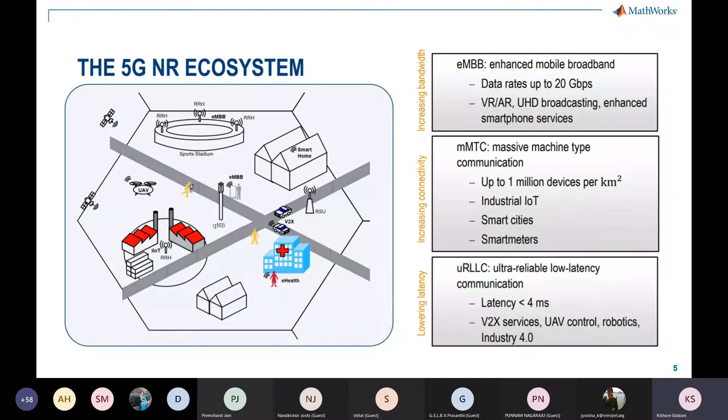Okay, this is good, but how do we achieve these applications, or how is 5G able to facilitate these three kinds of goals using the current standard? Let's look at what are the technical solutions that we have to achieve our goals of increasing data rate, increasing the connectivity, and reducing the latency.

So if we look at a high level, we can mainly take four main technical solutions. One is increasing bandwidth, which is similar to if you have a broad road, you will have a free flow of traffic. So in order to increase your data rate, one technical solution can be increasing the bandwidth at which your current communication operates.

And then the next one is better spectral efficiency, so that you will be able to utilize all the available bandwidth that was provided to you. Spectral efficiency also talks about having better adjacent channel leakage ratios and all, and another thing is having a flexible air interface to access the medium.

And then densification means employing more gNode Bs, so that you will have better coverage at every point of the location. So again, how do these technical solutions get translated into the existing 5G standard that was defined by the 3GPP standard body?

So one is, in order to increase bandwidth, unlike 4G LTE, the current 5G will be able to operate at FR2 band, which is a millimeter wave band, going from sub 6 gigahertz band up to now 60 gigahertz, giving you more bandwidth for better operation.

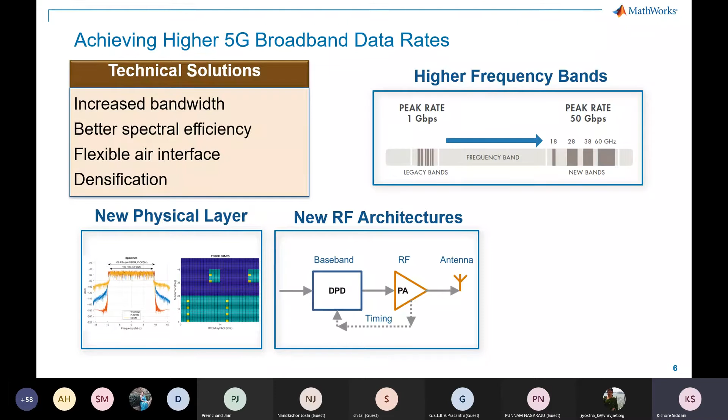And the third component that is important here is massive MIMO. When we are operating at high frequencies, there are high propagation losses within the medium. So what we are employing here is massive MIMO to steer the signal from the gNode B specifically towards the specific UE using beam steering and hybrid beamforming, which we will be discussing in detail as we go through.

So as listed on this slide, these are the important components: having a new physical layer and a more linear RF structure, and then employing massive MIMO communications to attain your 5G goals. In this session, as we go forward, we will pick up each of these - how to achieve a physical layer implementation using MATLAB and Simulink, how to improve fidelity of the system by including RF effects, and also how to bring in massive MIMO capabilities into the system.

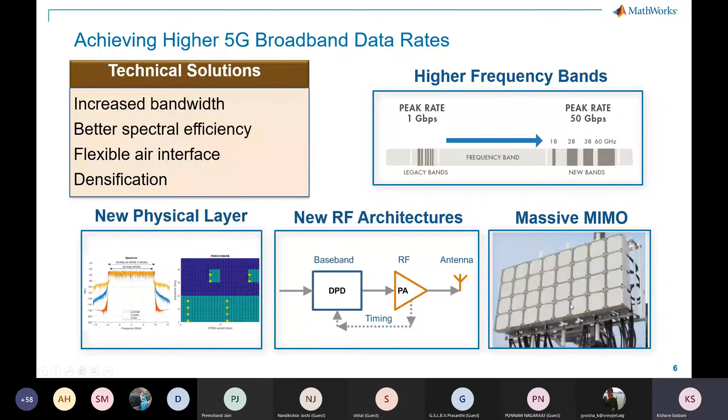Okay. So again, this discussion will be mostly focusing on giving you an idea of how you can model and simulate your 5G systems within MATLAB and Simulink. And for the standard part, right?

If you are new to the 5G standard or 5G NR standard, we have a series of videos. We have 16 short videos on our website explaining each and every parameter in 5G, compared with a 4G LTE system. I would highly recommend you go through this video series. I'll be sharing this slide deck at the end, so that you can go through the link and view the videos that are available on our website regarding the 5G standard itself.

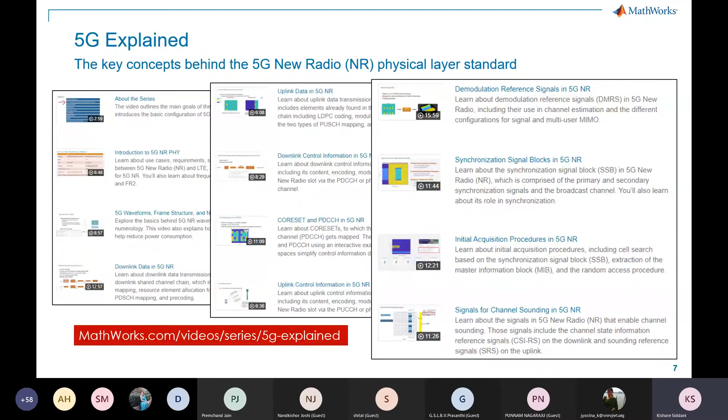Our main focus throughout this session will be mostly on the implementation or modeling of these 5G systems in MATLAB and Simulink. Okay, right? So as we saw in the previous slides, three components we are going to discuss. One is physical layer, next one is RF, and the third one is massive MIMO. And we will first see the physical layer and simulation. But before we go into that, let me give you an overview of a general wireless system.

Okay, I think before I go there, I'll just stop and check the chat. So, ma'am, is the chat enabled, right? Hello? Could you hear me? Yeah, Kishore, you are audible. Yes, sir, can hear you. Okay. Yeah, ma'am. So the chat is enabled, right? Yes, sir, it is enabled.

Okay. So I think Ramana, our colleague, posted a question in the chat. Are you aware of the 5G Toolbox? Before I go and introduce you to the 5G Toolbox, are you aware of it? You can type in your answers. I know this is a post-lunch session and it's a long session, so it's natural that we may not be active, but we can make this session as interactive as possible, and we will also go through many more demos as we go ahead. So I request participants to type in yes or no based on whether you are aware of the 5G Toolbox from MathWorks or not, before I go to the next slide.

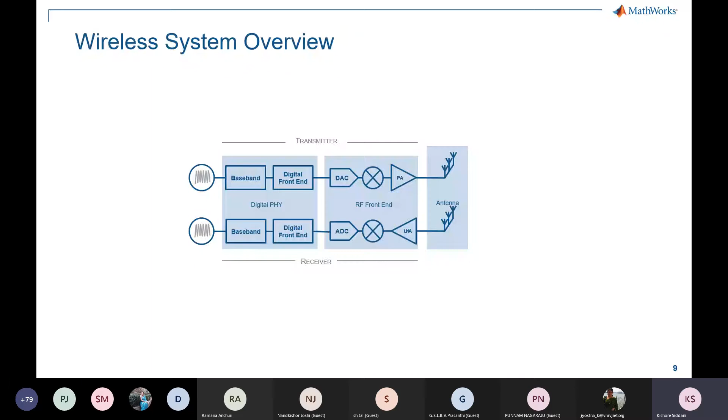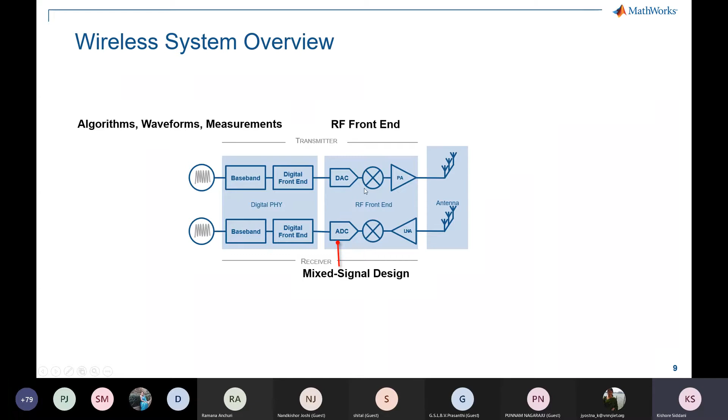Most of you will feel it easy to go through the next slides. So first of all, before I introduce the 5G Toolbox, let me talk about the wireless system itself, right? If you take any wireless system, not necessarily a 5G system, you can broadly classify it into three main parts. One we call the baseband, which consists of physical layer, algorithms, waveforms, and where we model our measurements. The next part consists of the RF front end, which consists of ADCs and DACs to convert between digital and analog domains. Then you have modulators and other nonlinear RF components like power amplifiers. And at the receiver, you will have low noise amplifiers and the demodulator components.

The third section of a general wireless system is antennas and antenna arrays, which convert your incoming electric signal into an electromagnetic signal and transmit it through the medium, right? While the channel is not an inherent part of the system, it is also a very important component when we look at system performance while transmitting and receiving. Between the transmitter and receiver, my signal will be affected as it passes through the channel. So the channel plays a critical role when we simulate end-to-end systems, from a transmitter, through the channel, to the receiver. So these three are the key components of a wireless system.

And we saw in the previous slides that for baseband 5G, we have a new physical layer defined by the 3GPP standard. For RF, we need more linear power amplifiers. And for antennas, we need massive MIMO antennas for 5G. So we will discuss these three sections in detail. So let me start with 5G.

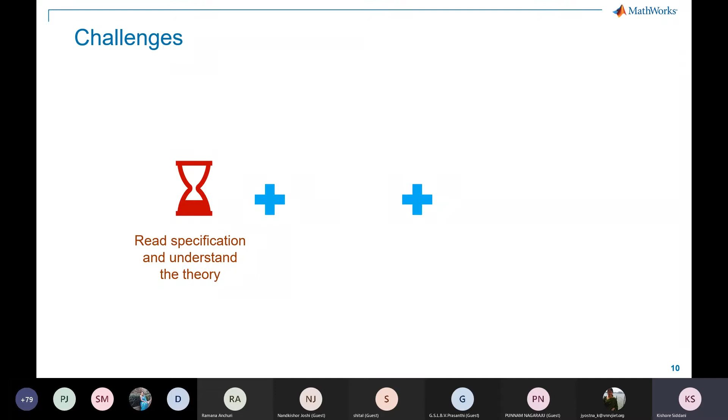So first, before we go ahead discussing the physical layer: let's say at this point of time you are going through this FDP training, and after this series of sessions you might want to implement a 5G system. The first step generally is to read through the entire 5G specifications and understand the theory part of that standard. And then you need to implement the algorithm specified in the standard, which would take a significant amount of time.

And then, once you implement your first cut of the model, you need to verify whether the algorithm that you implemented is in compliance with the 5G standard or not. So this would generally take a long time and reduce your development speed. And these are critical challenges in advanced wireless systems like 5G.

So here is where 5G Toolbox from MathWorks comes into place, with support for 5G, and it will let you focus on what matters the most. That is modeling and simulating the system, and not spending your time just going through the standard and understanding it by itself. So how does 5G Toolbox help in achieving this? How can it simplify your modeling and simulation, or make it easy?

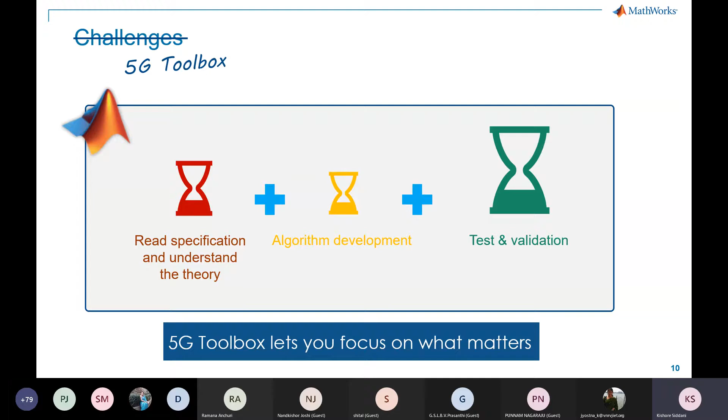If I look at 5G Toolbox use cases, I can classify them into three parts, starting with waveform generation. What I mean by waveform generation is that 5G Toolbox enables you to generate 5G compliant waveforms directly. You can generate a fixed reference channel waveform, NR test models, or custom waveforms based on the 3GPP standard. How we generate them, we will see in the next slide. So this is one: you can generate your 5G compliant waveforms off the shelf.

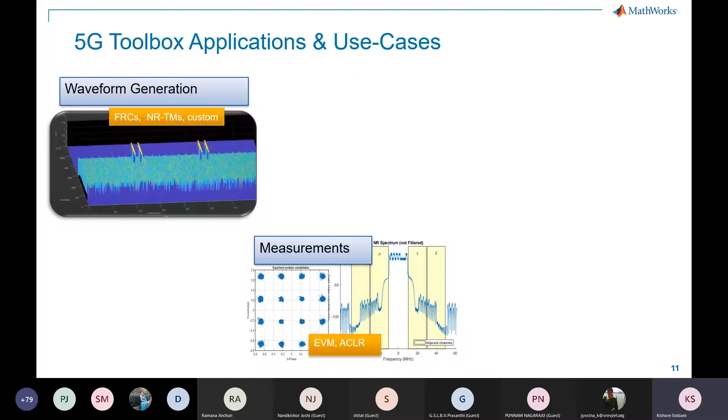And the next thing is measurement. Once you implement the system, the next necessary step would be: how is my system performing? To look at the performance of the system, you might need to look at components like ACLR, which is adjacent channel leakage ratio, and EVM, error vector magnitude, parameters of the end-to-end simulation. As well, you might need to do an end-to-end simulation to look at performance curves like BER versus SNR curves, giving you at what SNR you would achieve your required BER for a specific configuration.

So all these three things, waveform generation, measurements, and end-to-end simulation, can be easily achieved through 5G Toolbox with its support for the 3GPP 5G standard. Along with this, whatever waveform is generated, you can interface it with real RF signal generators to transmit the signal, or you can use SDR devices to stream the RF signals into MATLAB or Simulink, and then process your 5G signals inside the MATLAB and Simulink platform. So either you can generate and transmit, or you can receive the signal through an RF component, get it back into MATLAB and Simulink, and do the necessary processing required for 5G decoding. I will go through each of these things in detail.

As we go through the presentation, it is important to reiterate and see where we are. Currently we are discussing the physical layer part. Within the physical layer, we are introducing how 5G Toolbox is useful for physical layer modeling. And within 5G Toolbox, we are now discussing each of its capabilities like waveform generation, measurements, and end-to-end simulation. Now we will go through the waveform generation part of the 5G Toolbox capability.

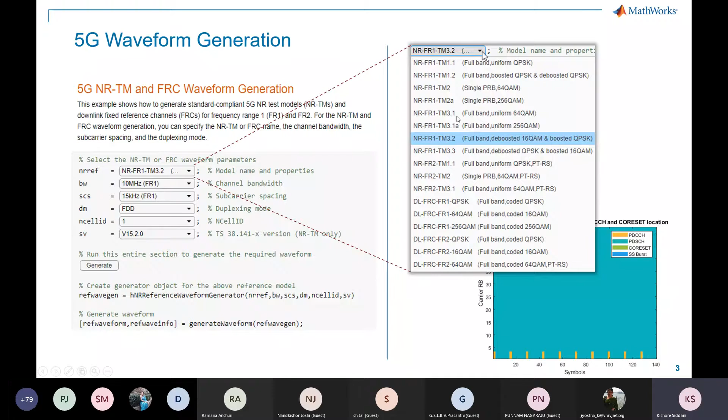Okay. And not just that, if you are new to the 5G standard itself, these might seem a bit new, but these define the frame structure within your 5G waveform. And as I told, you will be able to generate a custom waveform as defined in the 3GPP, and you can also customize each frame within the generated waveform.

Like you can customize your physical downlink shared channel, or physical uplink shared channel, or control channel, or broadcast channel, or random access channel, and also the synchronization or reference signals that you are generating, the primary synchronization sequence or the secondary sequence, or demodulation reference signals, or the CSI-RS reference signals. All these things you can customize in the app, and you can generate your own waveform based on the 3GPP standard, not just the 5G NR test models that are defined in the 3GPP standard.

Now let me go to the MATLAB and Simulink window, and I'll show you how we can use the waveform app and how we can generate the waveforms easily.

Let me know or give me a thumbs up in Teams if you are able to see my MATLAB window. You have reaction symbols enabled, I think. So if you have them enabled, give me a thumbs up, or you can post in the chat. Yeah, I can see some of you giving a thumbs up. Please go ahead and let me know if you are able to see the screen. Okay. I got a few thumbs ups, and I think you are all able to see my screen.

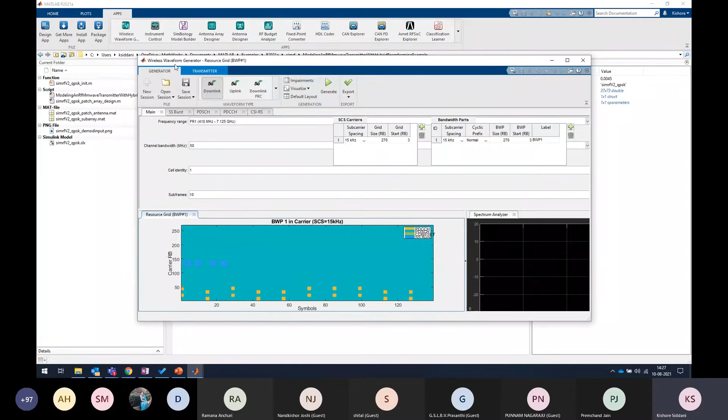So here are a lot of apps available for many of the toolboxes that come together with MATLAB and Simulink. The 5G waveform generator will be under signal processing and communications. You can go here and just click on the 5G waveform generator. And then you will see it opens up in the Wireless Waveform Generator app with 5G available. I hope my screen is visible. There might be resolution differences, but I will read you through the components that I am clicking on the screen so that you will be able to understand what those parameters are.

Once you open the app, it will come up with an interface like this. What you see here, NR 5G New Radio, these are the capabilities to generate different kinds of waveforms directly. The 5G downlink and uplink means you can generate a custom 5G downlink or uplink. 5G downlink FRC is fixed reference channel downlink, and likewise fixed reference channel uplink. And then we have a lot of test models as defined in the NR 3GPP standard that you can generate. So let me show you an example with the uplink fixed reference channel.

Once you click on that, it will give you all the available options for you to generate that specific waveform. Here you can select the frequency region of operation. Is it sub 6 gigahertz or a millimeter wave band? I'll go with the FR1 band, and you can now select the MCS, modulation and coding scheme. I'll select a 64 QAM signal, and then you can select the fixed reference channel model. Maybe I'll go ahead with the last one, which is a 100 megahertz channel bandwidth model.

Okay, so these parameters will define what kind of waveform you are going to generate. Again, not just the waveform parameters, you also have impairments that you can add to the waveform that you are generating.

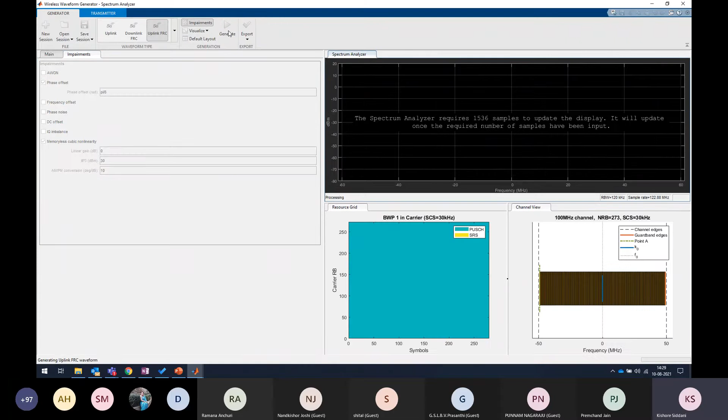You can add a phase offset or frequency offset to the generated waveform. Maybe I'll add a phase offset, and you can also add other nonlinearities like IQ imbalance or memoryless cubic nonlinearity, or add AWGN noise to the transmitted signal. So once you select your main components and your impairments, you can then directly click on generate here to generate whatever waveform you would like to have.

So this is the 100 megahertz channel bandwidth. You can see this is -50 to 50. This is a 100 megahertz 5G signal that we are generating. And down here is an OFDM grid, or resource grid, which is now completely occupied with uplink shared channel data. And what you're seeing on the bottom right is a channel view indicating which bandwidth is occupied by the transmitted OFDM signal. You can see that -50 to 50 is occupied, and it is indicating the channel edges as well.

So as we saw here, you can easily generate a waveform, not just generating and visualizing. As I told, it is very easy to interface with RF instruments if you have them connected to the PC that has MATLAB and Simulink. So once you have a specific instrument, now I am generating an FRC uplink 5G waveform, you can then select the instrument here and configure it based on the instrument IP address.

Then select your center frequency for transmission, give your bandwidth or what you would like your output power to be, and then just click on transmit, so that whatever 5G compliant waveform you are generating directly from the app, you would be able to transmit through your RF instrument over the air. So that's how it's very easy to directly generate and test your systems as well.

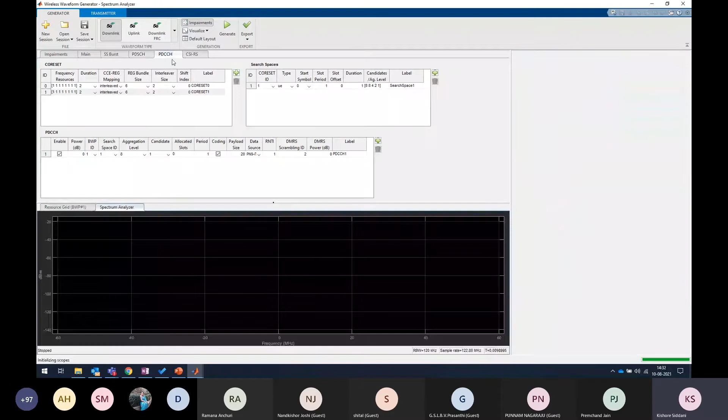This is again 5G standard compliant, but you have access to configure each and every parameter within the frame. If I click 5G downlink, you will now have options to configure your SS burst, downlink shared channel, downlink control channel, and your CSI reference signal. You can control and configure your CORESET configuration or the aggregation information in the transmitted signal.

This is again compliant to 5G, and you are able to configure it completely the way that you want. It is available for both downlink and uplink. And once you do that, adding impairments on the transmitter is similar. And one more option that I want your attention to is whatever waveform you generate, you can completely export it using export, Export MATLAB Script.

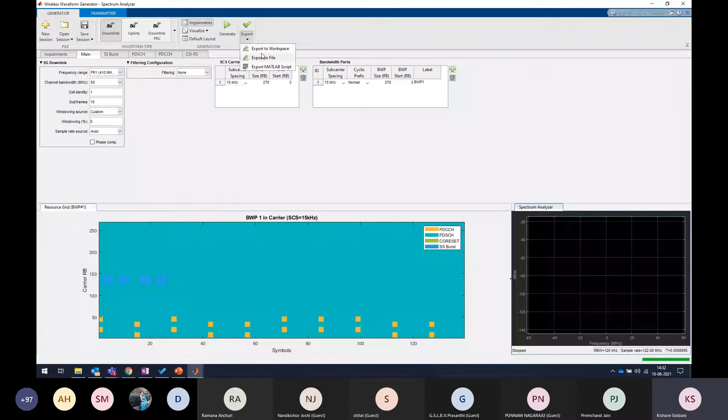What it will do is export whatever parameters you chose in the app into a MATLAB script. So next time when you want the script to run several times, you need not go to the app and design every time. You have the script now, and you can just write a for loop at the top of it, so that this script will run multiple times to give you the generated waveform multiple times.

And one of the key important features of 5G Toolbox is, as I told, 5G Toolbox has implemented everything 5G compliant, and whatever is implemented is completely white box. What I mean by white box is, suppose I have an SS burst configuration, if I right click and click on open, it will open the actual source code for how this is being done for SS configuration.

The entire source code is available for you to view, and if you have any modifications you want to do, you are free to edit and modify it as per your requirement as well. So whatever functions are used in 5G Toolbox are completely open box for users to view.

So let me come back to the presentation. So I hope you got a fair bit of idea into how you can use the waveform generator app for wireless waveform generation, right? So let's now go to an end-to-end simulation, or link level simulation. So first, to give you a very simple idea of what link level simulation is.

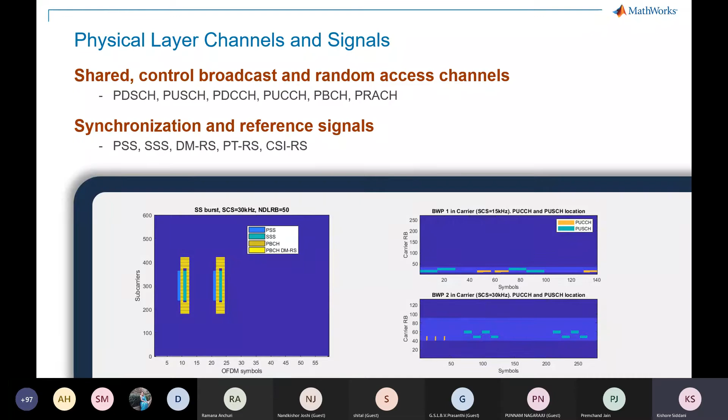You have a transmitter, then you have a receiver, and in between you have a channel, and you want to simulate from transmitter to receiver. Do the entire simulation and see what your performance result will be, like what is my bit error rate, and at what SNR I am achieving my required bit error rate, those kinds of things. So along those lines, one of the important things to note here is the channel model that sits between the transmitter and receiver.

And again, the 3GPP technical report 38.901 defines specific channel models with which you might want to test your 5G system. There are two kinds of model. One is the TDL channel model, which is the tapped delay line model, and the other one is the CDL channel model, which is the clustered delay line channel model. So the TDL channel model has different profiles like A, B, C, D, E or a custom profile, and it is generally a normal 2D channel model. It defines delay spread, Doppler shift and MIMO correlation between the transmitter and receiver to simulate your system.

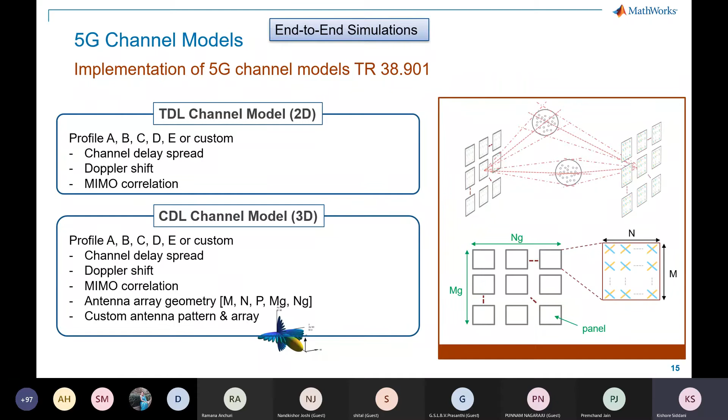Whereas the CDL channel model is a more sophisticated channel model, giving rise to spatial correlations, and it exists more in terms of 3D. So both the TDL channel model and CDL channel model are available off the shelf from 5G Toolbox. You just need to select the model and use it in your simulation when you are doing the end-to-end link level simulation. Okay.

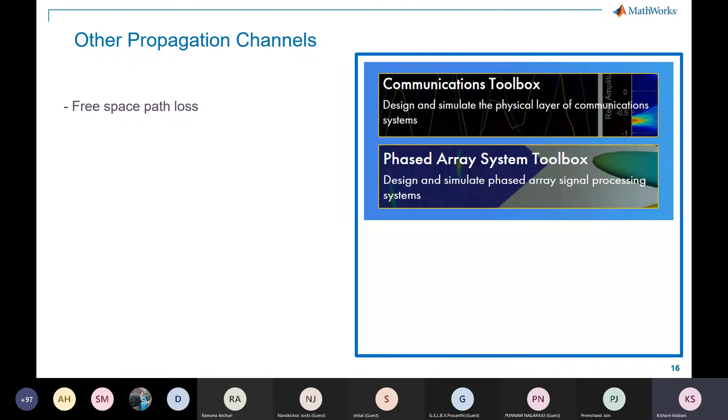So not just the TDL and CDL channel models: by utilizing the channel models from Communications Toolbox and some features from Phased Array System Toolbox, you would be able to simulate a free space path loss channel between transmitter and receiver, and also, if there are effects like gases, fog, or clouds between your transmitter and receiver, how the signal is attenuated as it goes from transmitter to receiver. You would be able to simulate that as well.

And generally 5G systems are MIMO. You would be able to simulate MIMO multipath fading channels as well, and other channel models like WINNER II and scattering MIMO channel models, other than the TDL and CDL channel models defined in the 3GPP standard. So these are all available off the shelf from the MATLAB and Simulink platform. You just need to select the channel model you want to simulate, and you can analyze how this channel is affecting your transmit signal and how you are correcting it at the receiver side, right?

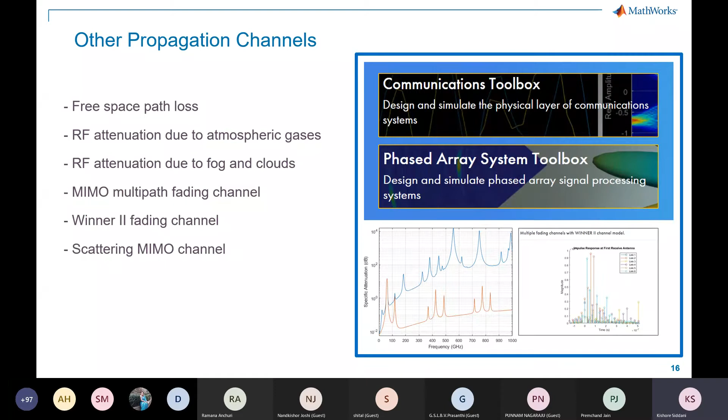So to further simplify your system implementation process, we have examples for NR physical downlink shared channel throughput analysis, wherein you have a complete transmitter section. It starts from the DL-SCH frame, encoding it to PDSCH, doing the precoding, and finally generating the OFDM waveform and transmitting it through a channel model, a CDL or TDL channel model, and then going through the complete receiver chain for decoding the frame. That means you start at the transmitter and go over the entire chain for end-to-end link level simulation. So we have an example available for this.

So maybe to quickly point you to that, I'll open MATLAB and show where you can find it.

A quick question. Ramana, maybe you can give me a heads up if you are able to see my help documentation screen. Yes, now it's up. Okay, okay. Is there any latency between what I'm speaking and how the slides are going? Not much, Kishore, but I heard some jitter twice, but it's fine now. Sure, sure. Please, if there is anything that is impacting, let me know. I will let you know.

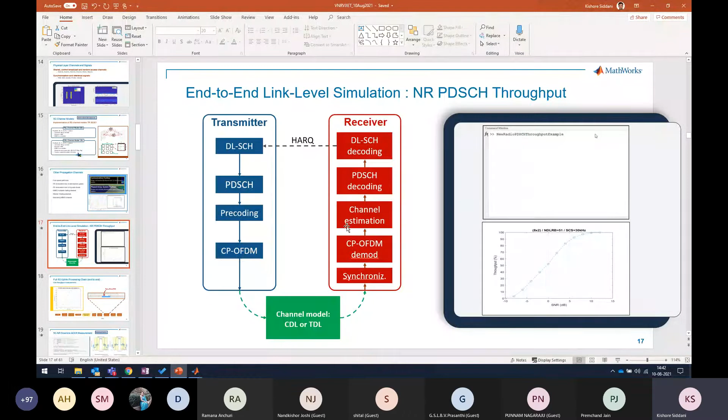So this is for physical layer downlink shared channel throughput simulation. Similarly, you have something for uplink processing as well. It's again end-to-end, wherein you will see shared channel uplink. It's again passing through a channel model, and at the receiver side, you will again have a similar kind of time sync and all, as per the uplink parameters.

And as I'm reiterating, whatever modules you see in the receiver, they are completely open white box, and you will be able to see what algorithm is used inside to achieve that specific functionality. So what MATLAB or Simulink is providing you is a platform readily available with all the examples for you to easily generate and test, and also giving you complete flexibility to edit wherever you may want.

Okay, I think I'll go to the next section. So we saw two things: first, waveform generation, and then the next one is end-to-end link level simulation. And the third one I want to concentrate on is measurements. Again, here we have examples readily available, live scripts.

Wherein you can use the 5G toolbox to do ACLR, which is the adjacent channel leakage ratio. We have an example for adjacent channel leakage ratio measurement.

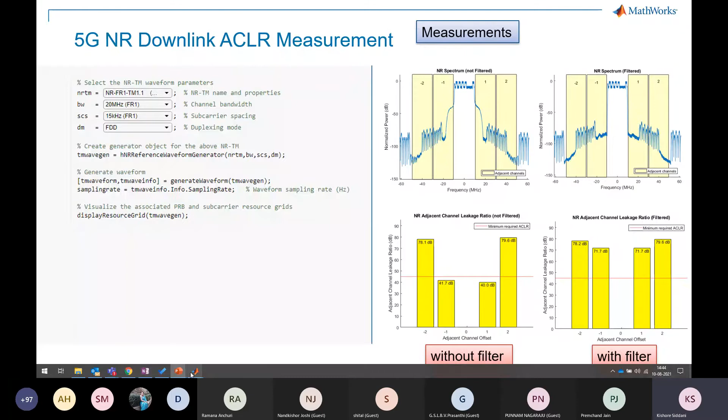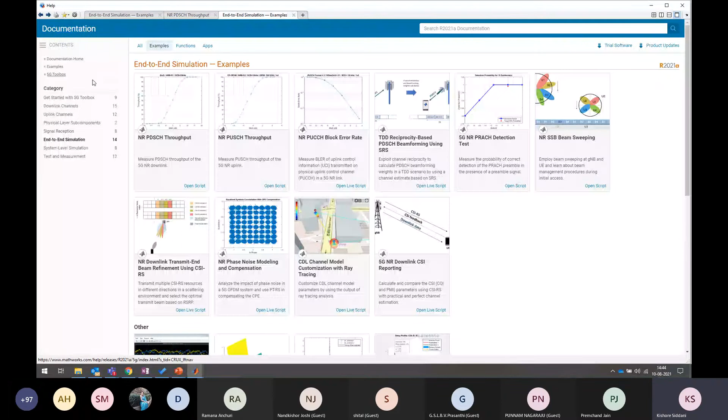If you go to the help section, test and measurement, you can see various examples, and here you can see 5G downlink ACLR measurement. In this specific example, we are generating an NR waveform and then filtering it and upsampling it, and then doing ACLR measurement.

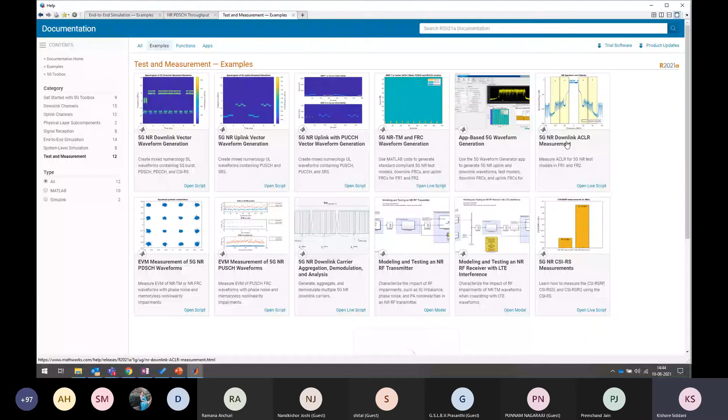How is my output without filtering and with filtering? If you look at this example, without filtering I can see there is a significant amount of signal in the adjacent band, which is not desirable. After filtering, when checking the ACLR measurement, I can see a reduction in the adjacent channel, an improvement in the ACLR gain by 40 dB.

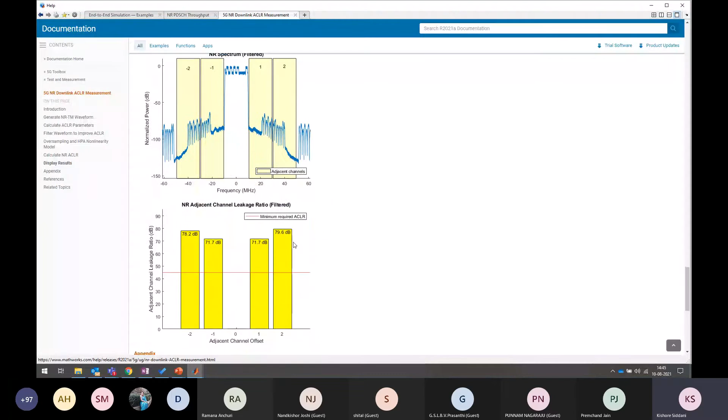So you have readily available examples for measurement sections as well, like ACLR measurement, and error vector magnitude measurement, wherein you generate an NR waveform, which is easy to generate from the waveform generator app. You add impairments like we saw here, adding phase noise and other nonlinearities, and then pass it through end-to-end link simulation to look at the error vector magnitude for each of your configurations.

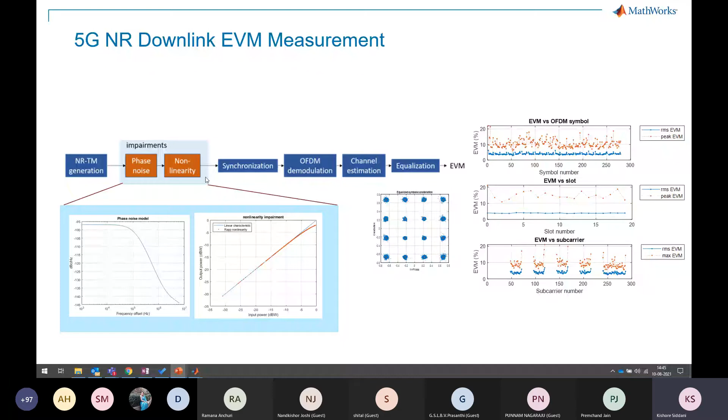Again, you also have a CSI related measurement, which will indicate the channel quality. The examples related for these are also off the shelf available within the 5G toolbox.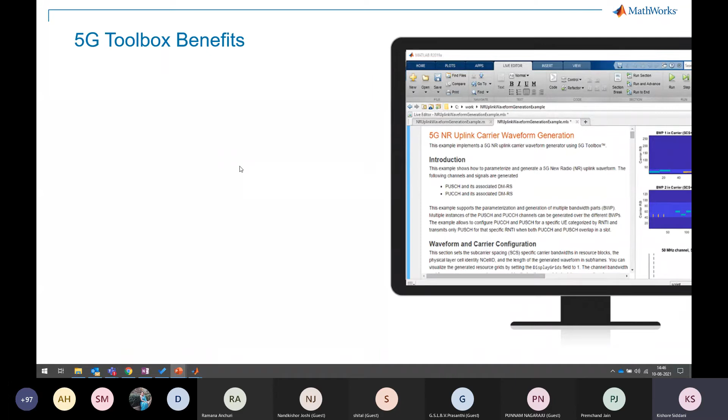So coming to a summary on the 5G toolbox itself, it has 5G-specific functions and a lot of examples for you to easily build up the physical layer that was specified in the 3GPP standard, without having to start everything from scratch. You have everything available now. You can make use of the existing waveform generator apps and examples to get started immediately, and it's also backed up by extensive documentation, not just for 5G toolbox. For all the toolboxes that come with MATLAB and Simulink, you have very dedicated documentation available, giving you highlights on each functionality and how you can achieve them.

And these 5G results are verified against external sources as well. And the point that I keep iterating, whatever functions we have seen are completely open, and you can visualize the MATLAB source code. So one advantage is if you want to tweak and tune any of this code, you are completely free to change and use it in your own systems to explore on that front.

And whatever MATLAB code is there, if you are looking at generating C code, maybe to use in some DSP processors or similar parts, the functions coming from 5G toolbox are C code generated and supported. You can generate the C code from the existing MATLAB source codes, so they are easily C code generatable. At the end, when I'm talking about prototyping and implementation, I will talk about how you are actually able to generate the C code as well, and what product is helping with it.

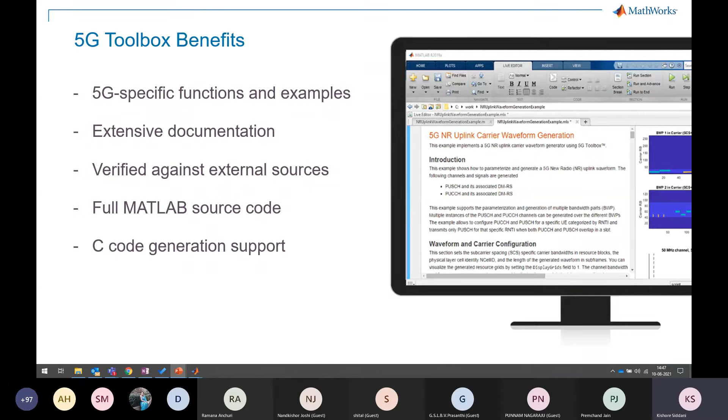So that's on the 5G toolbox front, and on the baseband physical layer part. I'll stop here for a moment. If you have any questions, please feel free to post. I think we have 30 plus 10, 40 minutes more, and we should be good to cover the remaining parts.

So participants, on the 5G toolbox we have seen its capabilities like waveform generation, measurements like EVM or ACLR measurements, and end-to-end link level simulation, which are all off the shelf available.

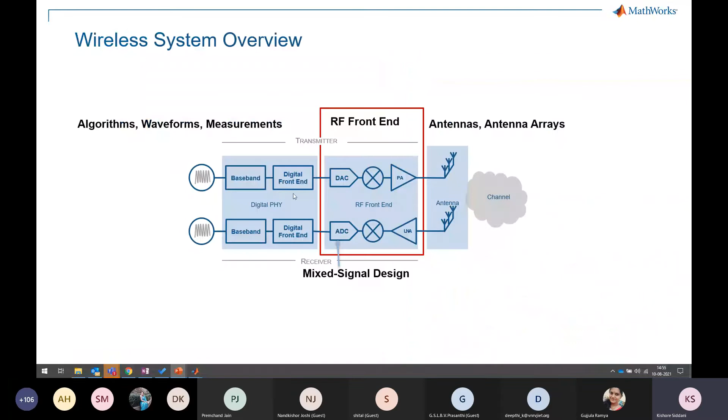Okay, let me move ahead. The next part is the RF part, which is the second component in our entire wireless system. We saw baseband and how the 5G toolbox helps. Now let us concentrate on the RF part, basing the 5G system as the main topic of discussion for this session. I want to concentrate on one key RF component, and a major requirement for 5G implementation is the power amplifier.

A power amplifier is nothing but you give some input signal and you want the system to amplify it and give the output signal. Suppose you give a number 2 as input, you want the output system to amplify it by 2 and give 4. You give 3, you want 6. You give 8, you want 16. That's true as long as your power amplifier characteristics are linear. But if you see general power amplifiers, they are not entirely linear. They have non-linear curves, as you'd see here, so the characteristics are not linear at high input powers. That means if you give 10, you're expecting 20, but you might only get 15 or 16. In terms of power, these non-linearities translate into intermodulations and undesired frequencies in the output.

So what technique is available to get the linear characteristics we want? Just use another component called DPD, or digital pre-distorter. The characteristics of DPD are such that they are opposite to your power amplifier characteristics. So when you send the input signal through a DPD with these characteristics and then through a PA with its characteristics, they cancel out each other's non-linearity, and the resultant effect would be linear at the output of the power amplifier. This looks simple in theory, but if you look deeper into power amplifiers, it's not just non-linear.

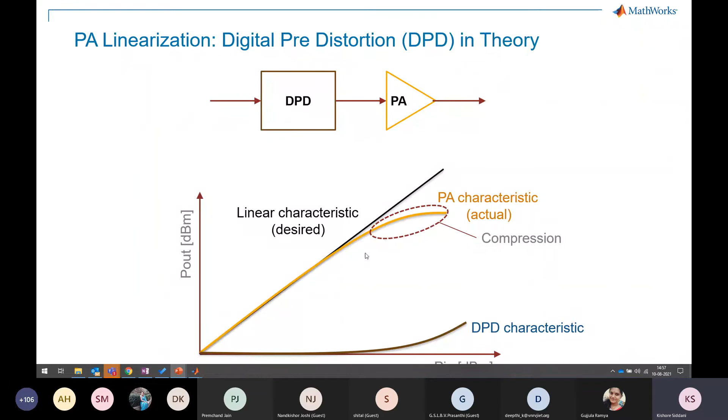It also has another impairment, which is memory based. What we mean by memory-based characteristics is that at any point, the output of the power amplifier might depend on its previous input, or the existing input signal at the input of the power amplifier as well. This is what we call the memory effect.

So in order to design your DPD, you first need to know how your power amplifier is functioning. And if it is just non-linear, you might model this power amplifier using mathematical equations, like a line equation or a parabola equation or something like that. But here you can see these characteristics are not only nonlinear but also having a memory effect. So in order to model the power amplifier first, before we go into DPD, we need something called a memory polynomial to express the characteristics of the power amplifier.

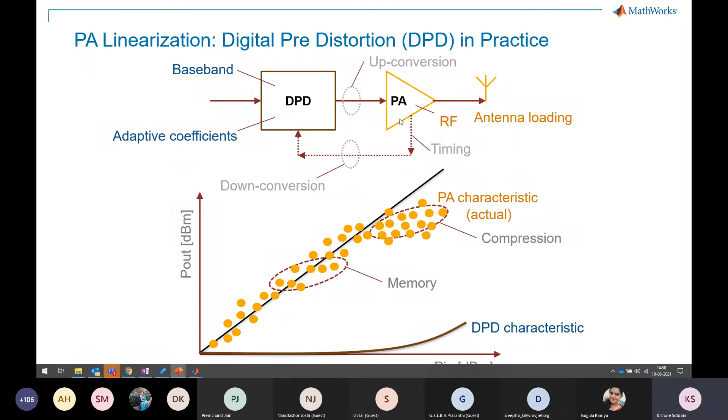So now I will talk about first how we characterize this power amplifier, and then we will talk about the DPD part. Okay, so what are the resources available to characterize a power amplifier which is non-linear and also has a memory effect? So first, take a real power amplifier, send some input signals and record your output signal. Then you will have, for a specific input, what your output will be at each power point. And then you can plot input voltage across power gain, that means at each input, what is your gain. If this gain plot is a completely straight horizontal line, then we call it a complete linear circuit. But here it is not linear, and you have non-linear characteristics of the power amplifier.

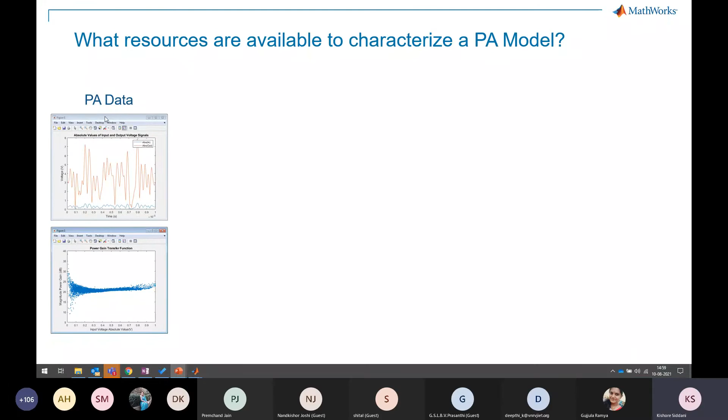So once you have these characteristics and these graphs, you can use something called the MATLAB fitting procedure, which, like all the 5G Toolbox algorithms, is also a completely white box algorithm, which you can use to fit the characteristics of your original power amplifier into a gain transfer function, and derive what are called power amplifier model coefficients. To put everything into basic words, what you need is power amplifier model coefficients which will characterize your model. I'm able to define a power amplifier using these power amplifier model coefficients.

So once I derive these model coefficients, I will put these coefficients into a block called memory polynomial, which is again a block from RF Blockset, to characterize your power amplifier. So by the end of this step, you will now have a power amplifier characterized with your power amplifier model coefficients. So now, as you know your power amplifier and its model coefficients, the next step would be to design your DPD opposite to that of your power amplifier. So we will now see a live example and see how this DPD works together with the power amplifier.

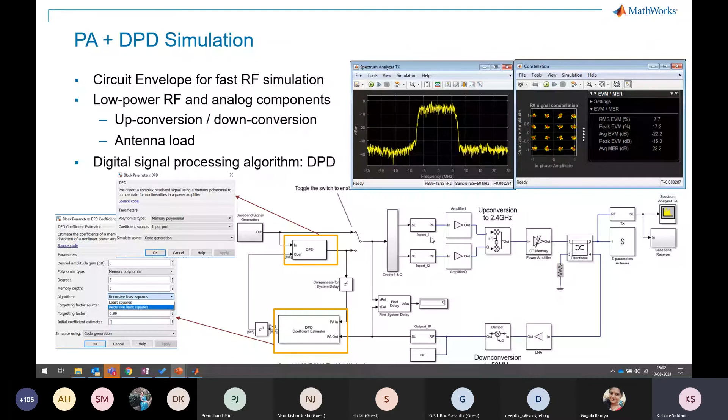So actually, maybe I'll go to the next slide and show you how this works. So this is a recorded video of how this model works. Okay, so now, just a second.

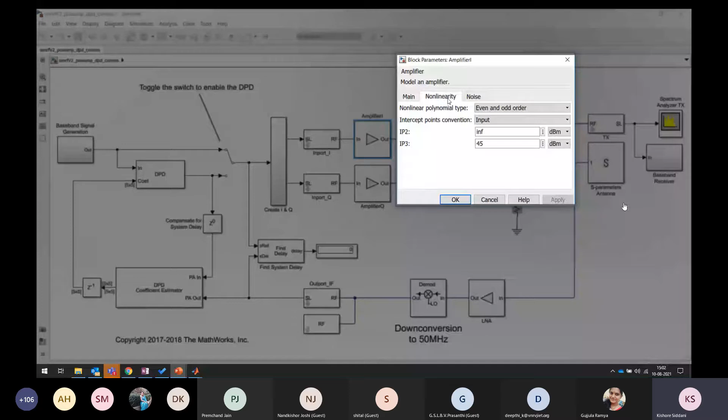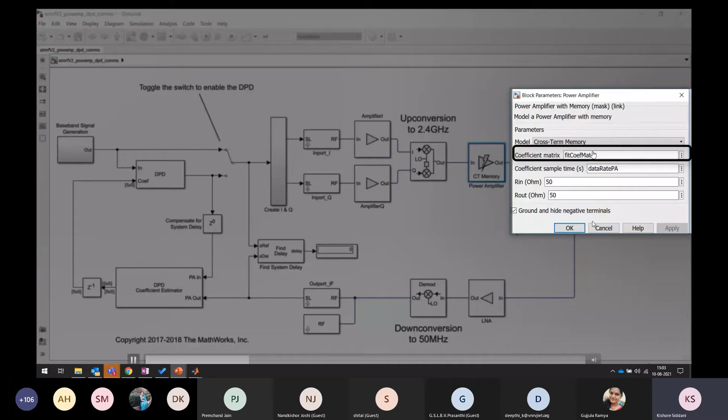So here I have a normal amplifier which is defined by its nonlinearity and noise level. This is not a power amplifier, and here I have a power amplifier block. If you see here, inside of the power amplifier block, I am defining the characteristics of this power amplifier by, you can see, the fit coefficient matrix. So I am telling that my power amplifier has these coefficients, so that I am actually modeling my original power amplifier in a Simulink block by giving it the coefficients, and we discussed in the previous slide how we get these coefficients by doing that fitting process.

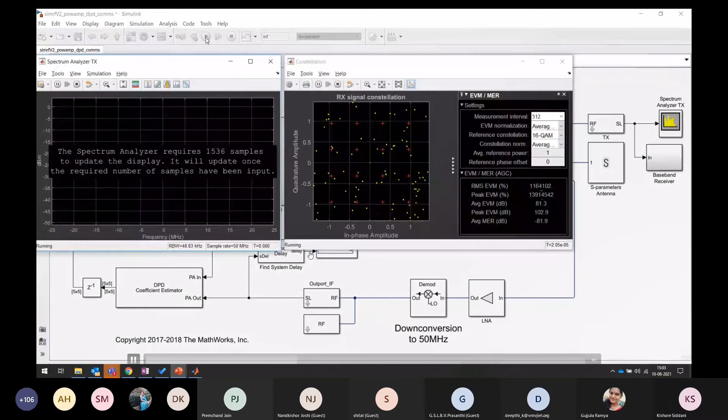Okay, so I'm now first simulating without DPD. I just have some baseband signal and it is passing through the RF section. Again, all the RF components that you see here, amplifiers and power amplifiers, are modeled using RF Blockset. And I'm simulating without DPD. I'm not doing any digital pre-distortion.

And if I stop simulation at this point, you can see the waveform is not so good. You can see there is a lot of distortion at the falling edges. And if you observe the average error vector magnitude, it is around minus 15 dB, which isn't quite good enough. Okay. Here are the distortions, and here is the average EVM.

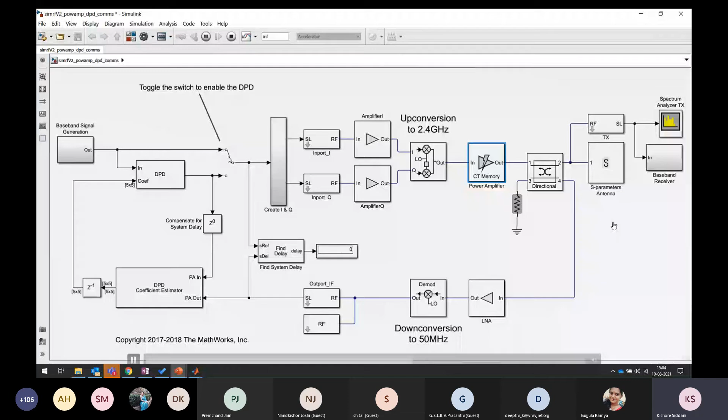Now let us simulate that together with DPD. Now what it will do is it will take the feedback. The DPD coefficient estimator will estimate the coefficients and put them into the DPD, and this DPD block will digitally pre-distort the input baseband signal.

You can now see the result. Previously, it was around minus 15 dB average error vector magnitude. It is now reduced to minus 26. The error is reduced, and you can also see that the graph has less distortion, telling that the graph is more linear, or the power amplifier is becoming more linear.

Right. So again, linearizing the power amplifier is an important concept in 5G systems, and if you are designing a power amplifier and digital pre-distortion algorithms, we do have the blocks available to do the modeling and also simulate them in the MATLAB and Simulink platform itself. So here, as I told previously, the digital pre-distortion is using either a least square algorithm or a recursive least square algorithm to estimate the coefficients.

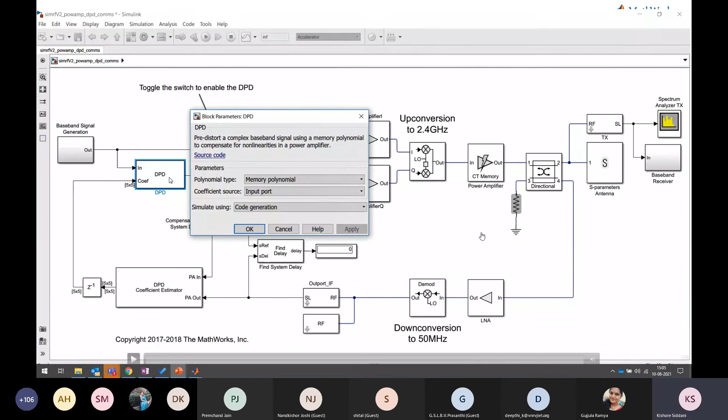Okay. So that's mainly about the RF part. I wanted to mainly talk on how you can actually design and model an RF system, and how you can design a digital pre-distortion algorithm to linearize your power amplifier.

So any questions here as well? So I'll take that as a no, and we'll move on.

So yeah, two parts completed. One is the physical layer where we are doing it using 5G Toolbox, and then the RF part where we talked about the power amplifier.

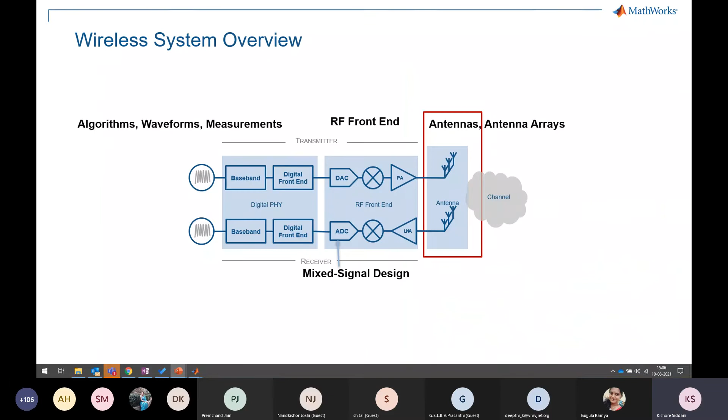Yeah, so we talked about the baseband and RF part. RF, where we are using RF Toolbox and RF Blockset to model the RF components and linearize the power amplifier. The next important part is massive MIMO and the antenna part, the last part of the wireless system, right? So before I talk about what massive MIMO is, what hybrid beamforming is, and how you can achieve that modeling completely in MATLAB and Simulink, let me talk about a product.

I mean, first, how do you actually design an antenna? How can you bring the antenna effects into the Simulink simulation itself? So we have something called Antenna Toolbox, using which antenna design is very easy and natural. It has a library of parameterized antenna elements, which means you can tweak and tune the antenna elements to your design parameters to achieve your desired antenna characteristics.

And the GUI is very simple. And unlike other EM tools for antenna design, you need not be an EM expert or CAD expert to design an antenna. It also uses a full-wave 3D method of moments solver to do a complete analysis of port, field and surface values when you are designing an antenna and using it for EM analysis.

And one of the major advantages of Antenna Toolbox is that, as it is completely integrated with MATLAB and Simulink, whatever antenna you design using Antenna Toolbox, you can easily integrate with MATLAB and Simulink, where you have already designed your baseband part and RF part. You can now attach your antenna to your system and do a complete end-to-end simulation to see the results.

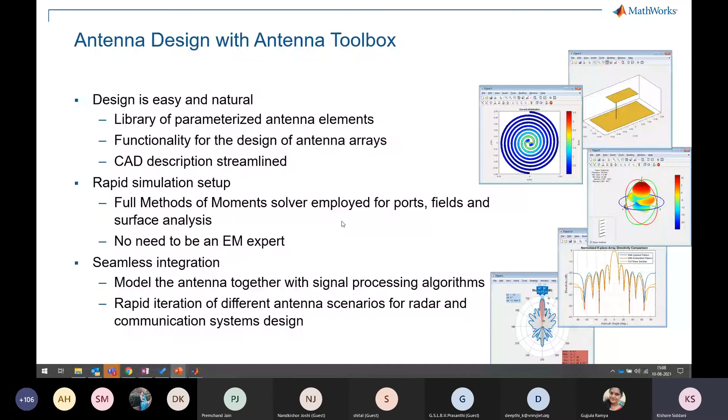Right? So, if you ask me how difficult it is to create an antenna using Antenna Toolbox, I would say it is as simple as writing these 5 lines of code to create a microstrip patch antenna and visualize its impedance, current, and 3D far-field radiation pattern.

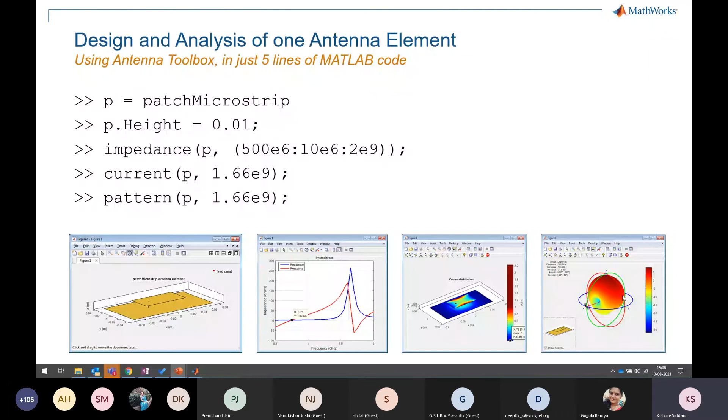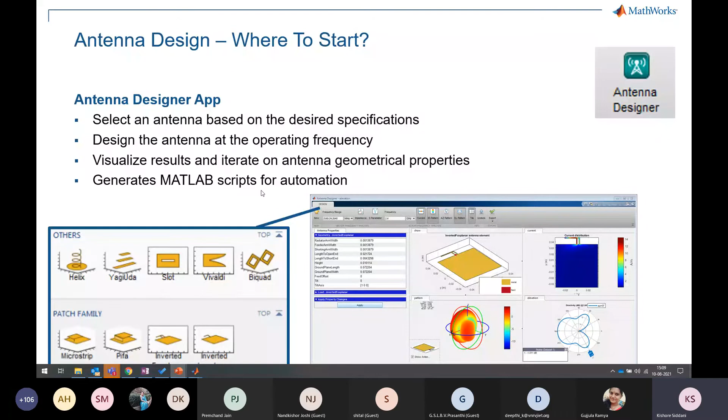So even if that isn't cool enough, we have something called the Antenna Designer app. As I told you, for many of the toolboxes we have apps which allow you to interact with the toolboxes and make the process simple. So for antenna design, we have the Antenna Designer app where you can select the antenna elements. I'll show you that. For antenna array design, where you have multiple antennas, we have the Antenna Array Designer app.

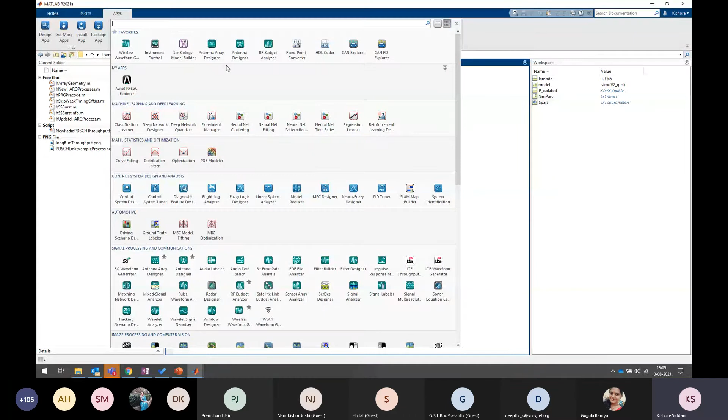So let's quickly go into the apps and see how we can design an antenna with the antenna and array designer apps. Again, they are available under Signal Processing and Communications. So if I go to the app Antenna Designer, it will open this GUI, or you can click on New, and it will show you a complete antenna gallery. You can choose from a whole list of over 100 elements from different families.

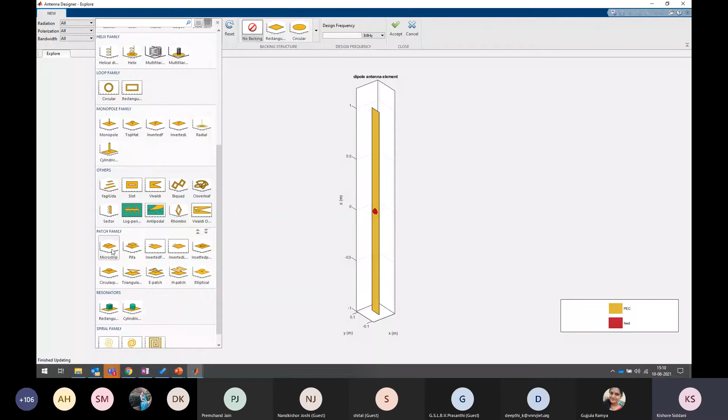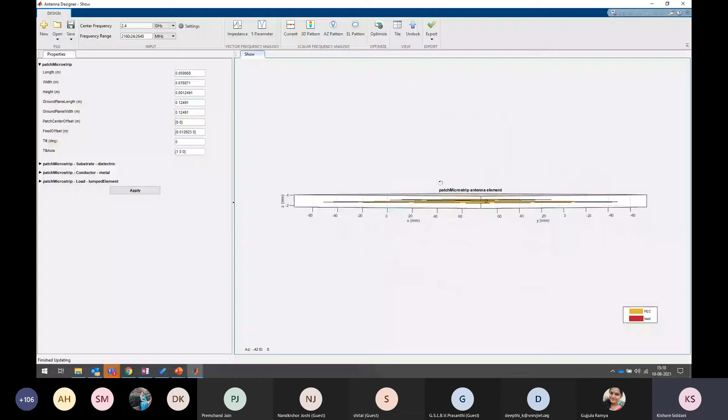So, one of my favorites, let me pick a microstrip patch antenna, and let's say I want to design my system at the 2.4 gigahertz ISM band resonant frequency. You just need to set the frequency and click Accept. It will automatically give you a designed microstrip patch antenna with a base and a microstrip patch. And as I told you, the geometry of this antenna is completely tunable. You have all the parameters, length, width, and height, which you can change and observe the characteristics.

Not only that, if you are using patch antennas, you have substrates to place, and you can also choose the metal of the conductor. Is it a perfect electric conductor, or do you want it to be copper? You can select that as well. Once you design the antenna, the analysis is quite simple. You just need to select Impedance here to plot the impedance of this antenna.

Currently I am designing this patch antenna at 2.4 gigahertz. So let us see the impedance plot of this ISM band microstrip patch antenna. As I'm designing at 2.4 gigahertz, you can see the reactance is 0 at 2.4 gigahertz, and when the reactance is 0, you say it's resonating at this frequency. Similarly, you can plot the S-parameters, the current distribution across the surface, and the 3D far-field radiation pattern. So this is the far-field radiation pattern of this antenna.

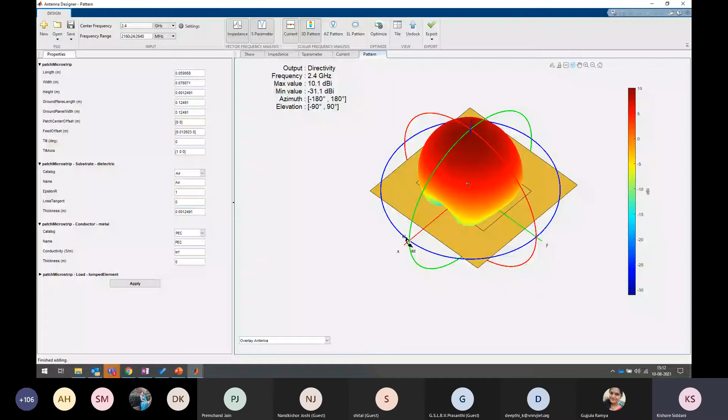If you want to observe in more detail, you can overlay the antenna and see the far-field radiation pattern with respect to the plane of the antenna. You can also view the radiation patterns in 2D plots using azimuth and elevation patterns. So you can now iteratively change the parameters and design the antenna to suit your requirements: your resonant frequency, your S-parameters, and your azimuth or elevation patterns.

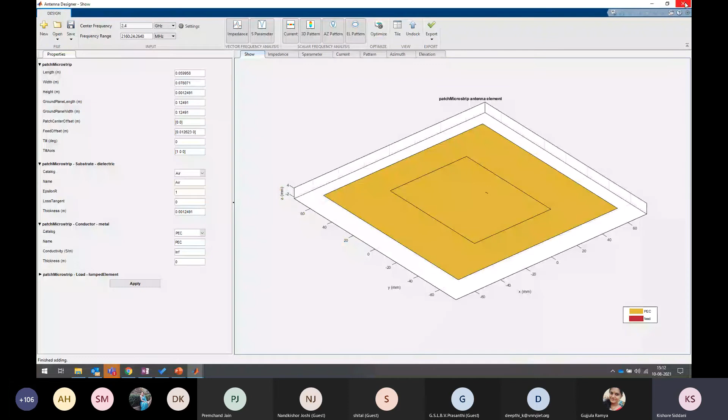Once you finish that, you can export the design as a script. Just click Export and then Script, so you can export it into a MATLAB script, which you can use later without needing to come back to the Antenna Designer app again and again. So yeah, it is similar with the Antenna Array Designer app.

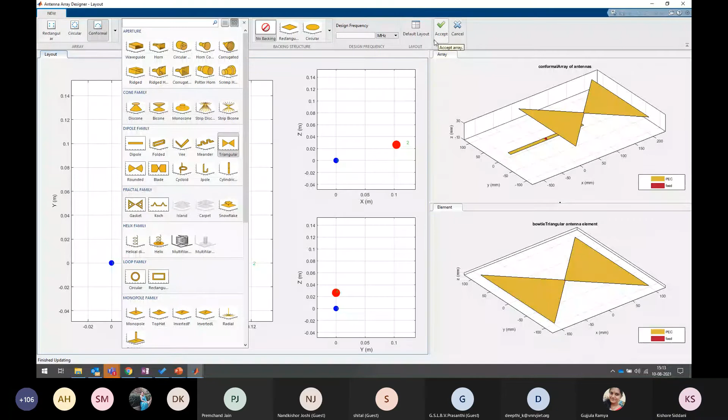When you click on the Antenna Array Designer app, a GUI opens up like this. You click on New, and then you will see different kinds of arrays: a linear array, rectangular array, circular array, or a conformal array, where you can place objects anywhere in 3D space. You select the element, then select the design frequency and click Accept to design and analyze your antennas. Okay. So that's mainly about antenna arrays and the Antenna Array Designer app.

Okay. So now let's talk about beamforming a bit. Beamforming is nothing but spatially orienting your signal in a specific direction, especially from a gNodeB towards a UE when you're talking in terms of 5G. That way you will have a very good SNR between the transmitter and receiver, and you will also be able to achieve high coverage. Beamforming is achieved by beam steering, and you achieve that steering by having multiple antennas at the transmitter and receiver. So you have an array of antennas, and you steer the signal in a particular direction.

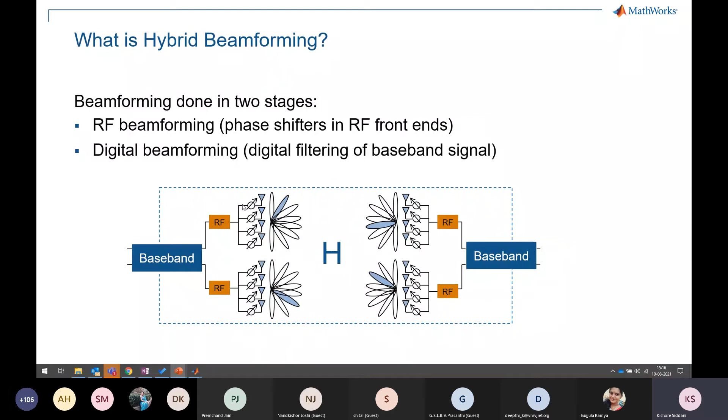If you are using MATLAB and Simulink and you want to do beamforming and analyze your system, what is the workflow? It's very simple. First you generate a waveform, using the waveform generator app for 5G. Then choose your RF front end, which is designed using RF Toolbox and RF Blockset, then design an antenna array using Antenna Toolbox, and then choose a channel model.

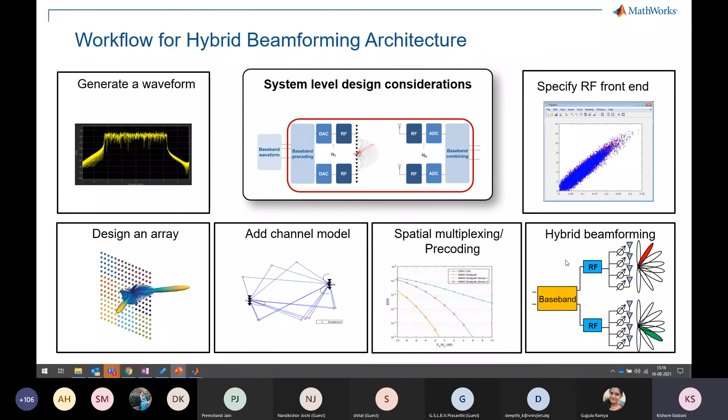Various channel models are available: TDL, CDL, MIMO, free space channel models. And then determine the pre-coding matrix that has to be applied at the baseband level for digital beamforming, and then bring out the structure for hybrid beamforming. So I'll talk about an example here.

Just give me a second.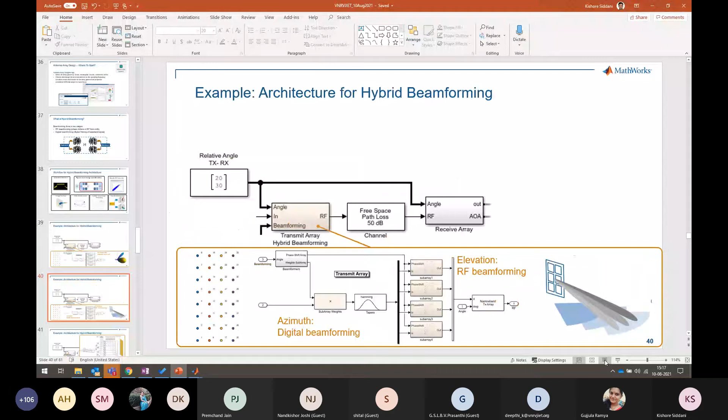Yeah, so I'll talk about an example here, a Simulink model which is doing this hybrid beamforming. Maybe I will directly open the example and talk in there.

So this is my... Ramana, are you able to see my Simulink screen? Yes. Okay.

So this is a Simulink model where we are doing hybrid beamforming. Let us look at the components. We have a QPSK transmitter, which is sending some baseband signal, and then we are doing hybrid beamforming, and then there is a free space channel, and then there is a receiver array.

So I would say, in Simulink, especially when you are looking at communication systems, this is one of the most high fidelity models. That means you have the effects of everything in a real world system. You are doing the baseband generation. Inside this block, which I will show you, we have both RF and antenna impairments included, then we have the channel included, and then we have complete receiver processing.

That means end to end, starting from baseband, all the parts you would see in a general communication system are included in this Simulink model. So Simulink, with its multi-domain modeling capability, provides you the flexibility to model an entire system and simulate it. My focus in showing this is to dig in and show you the hybrid beamforming within this.

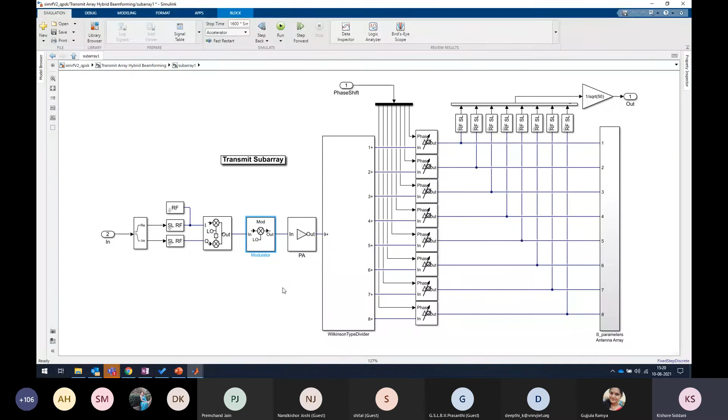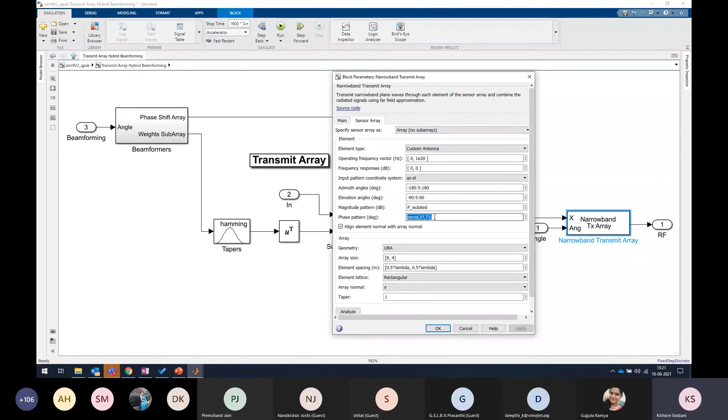And then we have the next stage in the structure, which is antennas, implemented here from a block from Phased Array System Toolbox, which is a narrowband TX array. If you see here, the antenna designed in Antenna Toolbox is brought in inside the sensor array. You have options to select an isotropic antenna or a custom antenna. If you select custom antenna, you can bring in any antenna that you design using Antenna Toolbox, and you will specify the magnitude pattern and phase pattern of this antenna. That means you are designing an antenna array and bringing it into your simulation.

So this is an end-to-end complete system having everything. Here we have a free space path loss channel. So this is how you can construct a multi-domain end-to-end system and simulate it. Now, an important point that I want to add. Here we are using a QPSK transmitter and receiver, but if you are into 5G, you can replace this QPSK transmitter and receiver with a 5G transmitter and 5G receiver. The way during waveform generation we saw all the algorithms, you can replace these blocks with that.

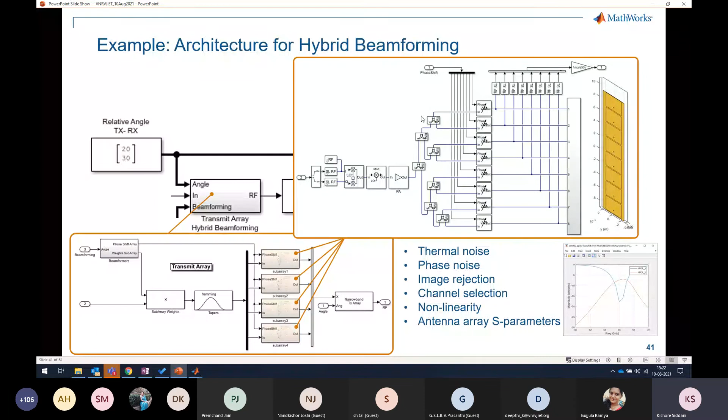So the next few slides talk about those hybrid beamforming things. As I opened up and showed you, there is this transmit array, and within that you have phase shifters, and each sub array would be looking like this with eight RF chains. So the key point here is if you are looking at the 5G side, you can replace the QPSK with the 5G NR transmitter and 5G NR receiver, and do a complete end-to-end together with power amplifier, DPD algorithms, and your antenna parts to simulate your end-to-end system.

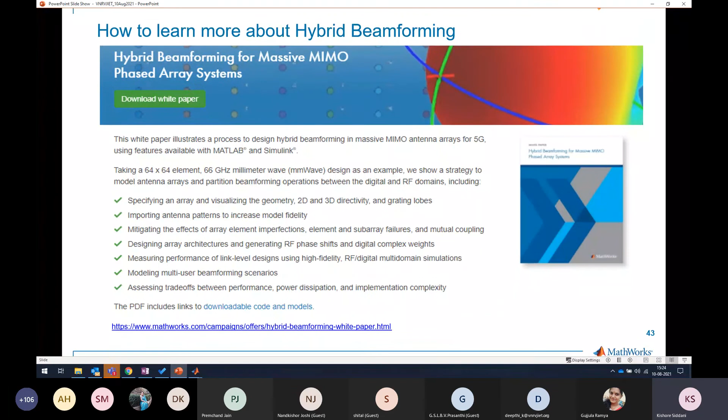So, last part of this section: prototyping and implementation. As shown in this section, I have constructed a model and validated it together with RF and antennas, and I am confident my baseband algorithm is working perfectly and achieving very good results. The next step is how to take this baseband algorithm onto real hardware, so it sits in the hardware, works through the actual RF card, transmits through actual antennas, goes through an actual channel, and you see the actual results.

So in order to do that, the next step is prototyping and implementing. When you have this kind of model, at a starting level we call it a behavioral model, and we generally work with floating point values, double precision floating point values. So when going for implementation, the first step is to convert the double precision floating point model into a fixed point model.

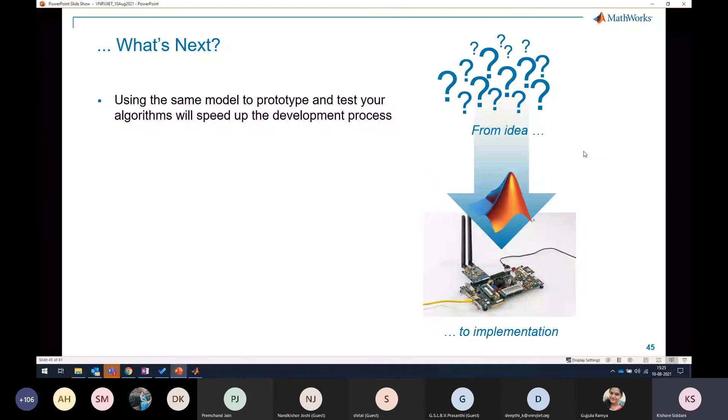In order to do that, MathWorks defines the workflows and also provides tools to simplify that workflow. So fixed point conversion is one step in the workflow towards implementation. To simplify that workflow we have something called the fixed point tool, which is from the fixed point designer toolbox. If you construct a Simulink model, you will be able to convert the double precision floating point model into a fixed point model directly using this fixed point tool.

Once you convert the model into fixed point, the next step is how to implement that fixed point model onto hardware. If you are trying to dump it into hardware, you have two possible cases: one, you might be targeting an FPGA or a programmable logic on an SoC.

For that case, you can use a product called HDL coder, which can automatically generate synthesizable VHDL or Verilog code. That means you just have a model, and without having to write a single bit of HDL code, it can automatically generate the HDL code for you, which it can also port onto the hardware, or you can port it onto the hardware yourself. And the HDL code that is generated is completely white box, which is portable, editable, bit-true, and cycle accurate to the original model.

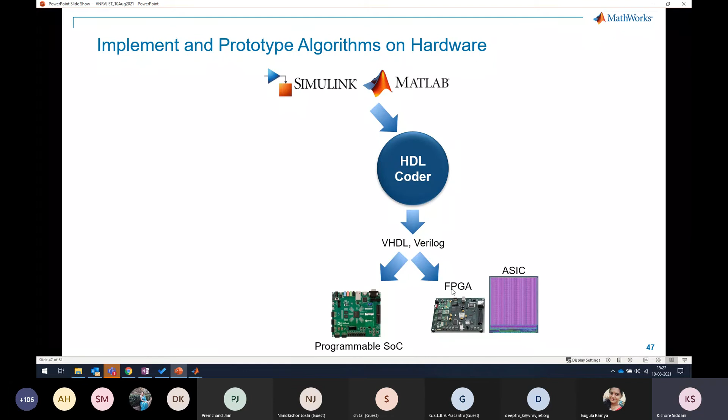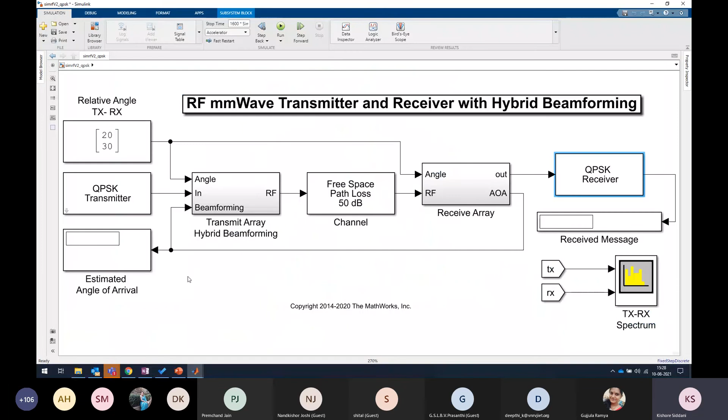You can use HDL coder if you are targeting devices like FPGAs or programmable logic on an SoC. But if you are on platforms like DSP platforms, Android side, or app generation side, you might want to use an embedded coder to generate optimized C or C++ code to target DSP platforms like ARM processors or the processor sitting on an SoC. So these are the two toolboxes that can help you with code generation and deploying your model into something completely code generated and working on real hardware.

So again, just a quick point here.

Yes, you can use it, Nazir. As embedded coder is supported to generate an optimized embedded C or C++ code, you can use the embedded coder to generate that code and put it onto the target hardware.

One main point here between the behavioral model and making your model ready for code generation: the blocks that you use in the model should be code generatable. That means they should be fixed point arithmetic, and they should be streaming algorithm based.

Even in this step, we have something called the wireless HDL toolbox that provides blocks you can use directly - blocks that are HDL optimized and 5G NR compliant. That means, suppose you want to use an LDPC encoder in your transmitter chain of your 5G system, you can directly pick an LDPC encoder from the wireless HDL toolbox, which is completely HDL optimized, and you would be able to generate the HDL code, either for that block or for an entire system that you might want to generate.

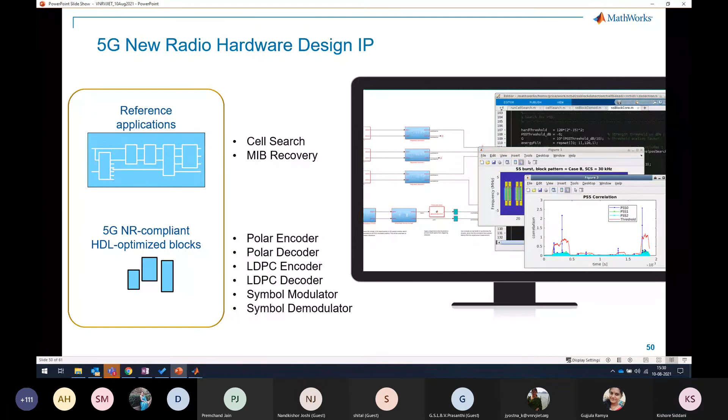Okay, and in terms of prototyping and implementation, to help you get quickly started, we have a very good set of examples, especially on the 5G side, like how you can do a 5G NR cell search or MIB recovery. These days we are seeing a lot of traction towards using RF SoCs, which are the new entrants into the hardware side, as a main tool for many customers. You can use RF SoCs for your implementation, and these are readily supported for implementation using MATLAB and Simulink.

Yeah, so it's a 5G toolbox starting from 18B.

So that brings me to the last sections of the summary. As we discussed, I went through baseband, RF, and antenna, and our main focus for this session stayed towards particular parts like baseband, how we use it for 5G. We discussed waveform generation, ACLR and EVM measurements, and end-to-end link level simulation, and viewed that this is completely open source code. But you can also use Communication Toolbox, Phased Array System Toolbox, and the 5G Toolbox for entire LTE, WLAN, and 5G baseband generation as well.

And then we have the RF front-end. Here, especially, we discussed the power amplifier part, and the linearization of power amplifiers using the DPD algorithm, and how you can simulate that within a Simulink model. But again, you can construct an entire RF front-end using RF Toolbox and RF Blockset available from MathWorks and the Simulink product suite. On the antenna front, we have looked at massive MIMO antennas and hybrid beamforming, and talked about Antenna Toolbox, how you can quickly design a single antenna and antenna array.

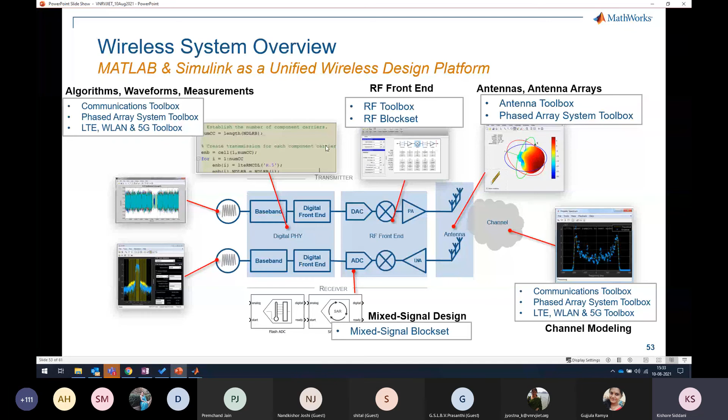And having said that, it doesn't stop at the design part. We can also use our coder products to further prototype and implement your architectures onto hardware. You can leverage HDL Coder, Embedded Coder, and Fixed-Point Designer tools for fixed point conversion, VHDL or Verilog conversion, and embedded code generation.

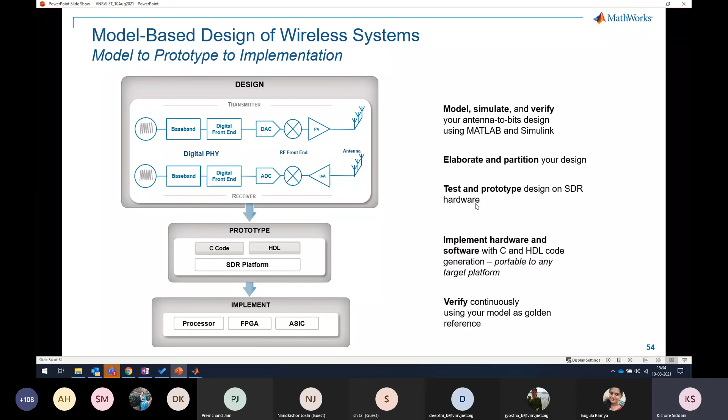So if you ask me, where can I go next? What can be my immediate next step after this session? One thing I would recommend is if you are new to 5G and would like to look at the differences from 4G LTE to 5G, I'd recommend the 5G Explained series. As I pointed out earlier, it's a 16 module course with short 10-minute videos explaining all the physical layer parameters.

If you'd like to know more details on the 5G Toolbox itself, I highly recommend you go to our product page, including the documentation, where you can see complete details on the product and how it works. We also have a lot of white papers on 5G implementation using MATLAB and Simulink, which you can find at our products page.

And next, okay, I read through the documents, what can I do next? Yes, you have a plethora of examples, starting from designing, modeling, simulating, both RF and hybrid.

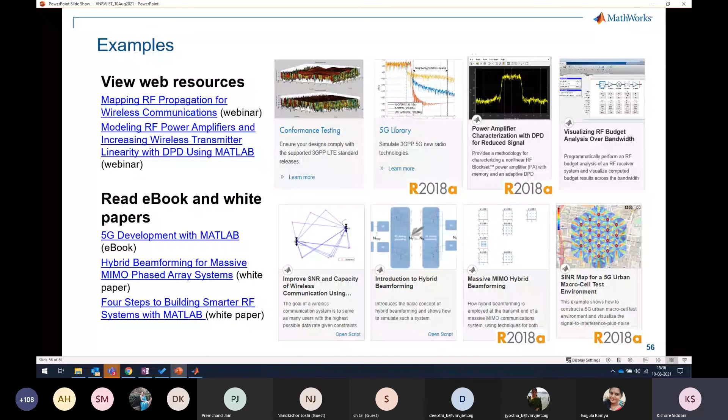So if you say I am new to MATLAB and Simulink, or new to these platforms, where can I get started? MATLAB on-ramp and Simulink on-ramp can be your best bets - interactive and free courses. You don't need an installed version of MATLAB. You can just go to mathworks.com, create your MathWorks account with any Gmail account, and then access MATLAB on-ramp and Simulink on-ramp.

This will not only provide you with an overview of how to use the tools, but at the end it will also provide you with course completion certificates, which might help in developing your digital resumes as well.

Not only MATLAB and Simulink, we have recent hotcakes in the industry - machine learning and deep learning, which is a focus of this series. If you'd like to know how to employ MATLAB AI into the 5G part, that will be covered in tomorrow's session. But before that, if you want to know more about how machine learning or deep learning workflows can be achieved through Simulink, I'd recommend these free on-ramp courses.

If you want to exploit the full potential - know all the intricacies and details of how to use each product of your interest - we have a lot of trainings available. These are paid training courses which you can see on our website, and they can be customizable to your needs and modified. If interested, go to mathworks.in/training and you'll find the list of courses and the outline of each training course.